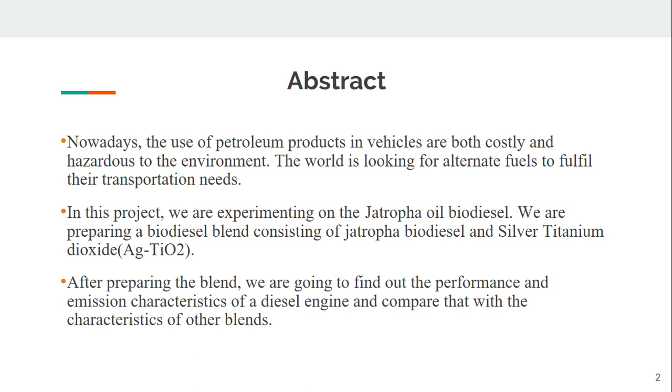Now, after preparing the blend, we are going to find out the emission characteristics of the diesel engine and compare that with the characteristics of the existing diesel. To introduce the thing, the renewable transportation fuels are ethanol and fuels derived from animal fats and vegetable oils. The choice of vegetable oil as engine fuel is to reduce emissions. There are various oils being considered worldwide for use in engines. These include Jatropha, Karanja, rice bran, sunflower oil, and even soybean oil.

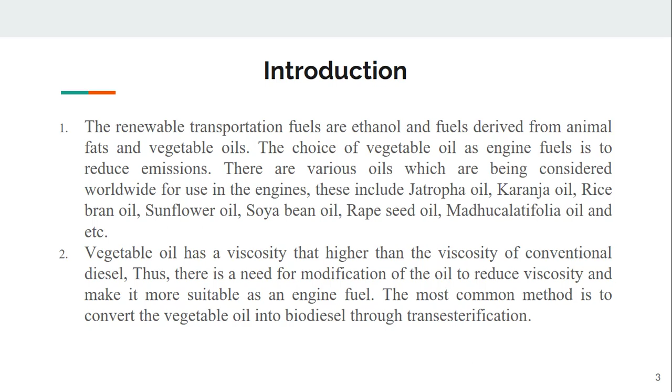Now, vegetable oil has a viscosity that is higher than the viscosity of conventional diesel. Thus there is a need for modification of the oil to reduce viscosity and to make it more suitable and sustainable for the engines. For this, we went through the literature survey, and we found various explanatory methods which can explain problems which we are facing today.

We studied the paper written by PK Sahoo, LM Das, MKG Babu, showing that biodiesel proportion of more than 20% of the blend tends to decrease the BSFC. It is seen that during part throttle test mode, blends with higher percentage of biodiesel in diesel tend to decrease the exhaust smoke. These are the things which we collected.

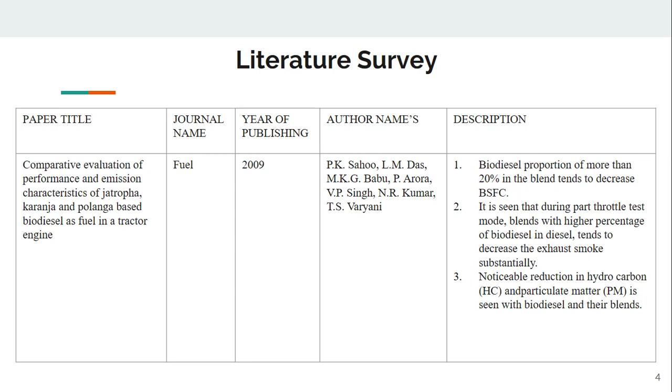Other papers which we have collected show that the oxides are being reduced. Oxides of sulfur, CO2, HC, and all those are being reduced, and the eventual performance quality is being enhanced. This is what we have referred to through 2 or 3 papers, and the list of the papers is given in the PPT.

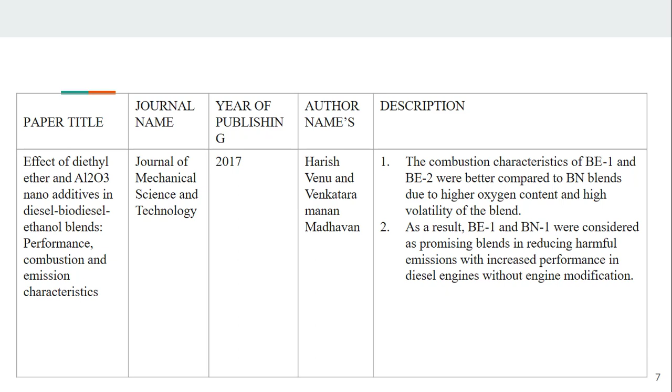Now, to define the problem, we are going to find performance and emission characteristics of Jatropha biodiesel with AgTiO2 as the nanoparticle. There are 2 blends comprising 90% and 70% of diesel, combined with 10% and 30% of Jatropha biodiesel, in which 25 ppm or 25 mg per liter of AgTiO2 is added. Then we are going to compare their characteristics to the biodiesel blends.

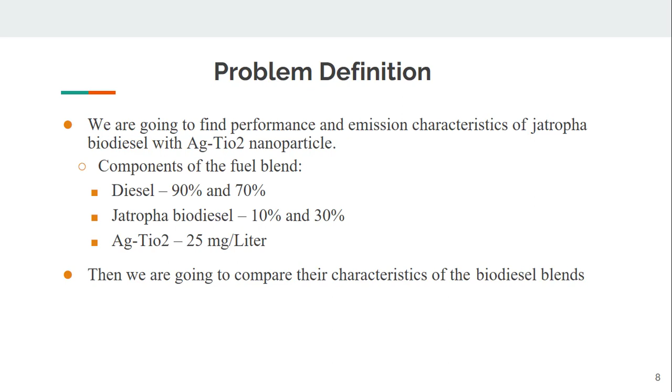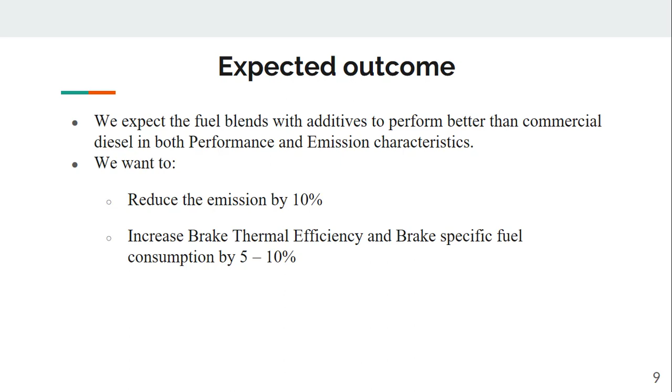Now, we are predicting the outcomes that we expect. We expect the fuel blends with additive to perform better than commercial diesel in both performance and emission characteristics. We want to reduce the emission by 10%, and improve brake thermal efficiency and brake specific fuel consumption by 5 to 10%, which will enhance the engine's performance quality.

After which, the most essential thing was that we had to mix the biodiesel and the nano additive to its particulate level so that the emission results which we get are perfect because of the continuous blending.

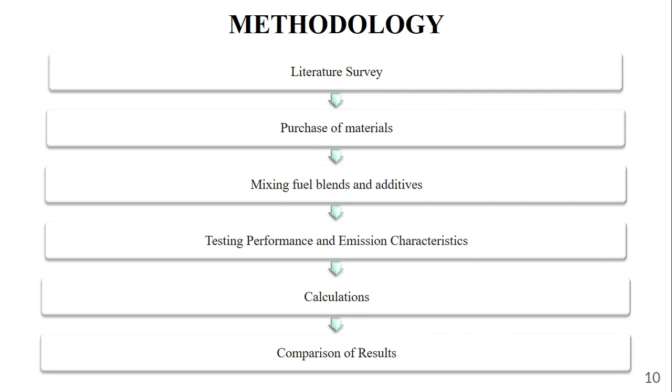Now then we went through the theoretical calculation, and after the theoretical calculation, the comparison of the results was done. Now to go on with the engine specification as it is given in the PPT.

Now we go through the speed - the engine runs on a constant speed. Cooling arrangement is water cooled. The cylinder bore is 87.50 mm, stroke length is 110.00, connecting rod length is 234. Compression ratio is 17.50, swept volume is 661.45 cc.

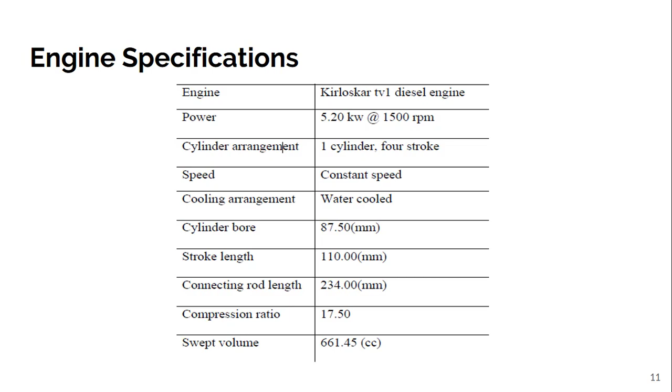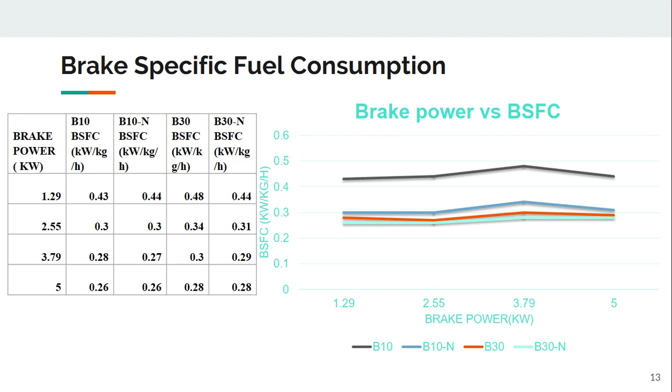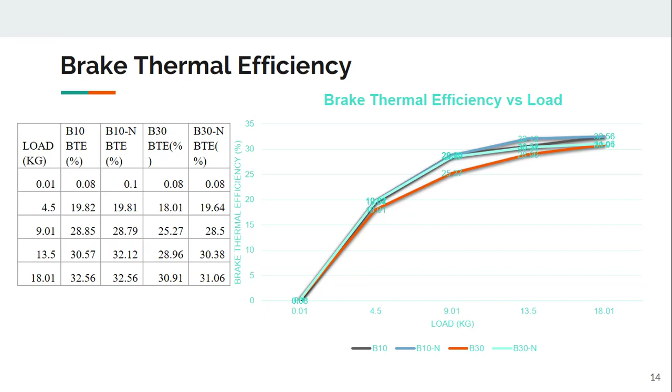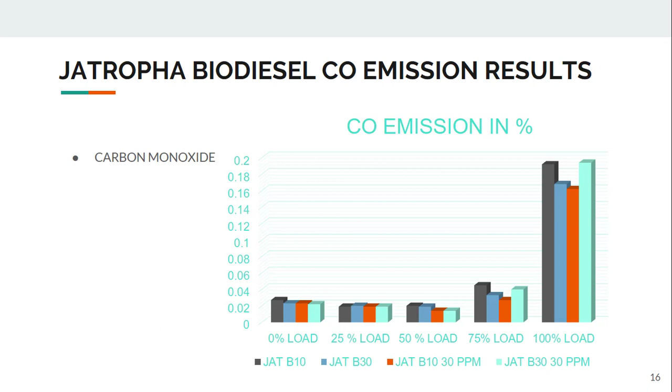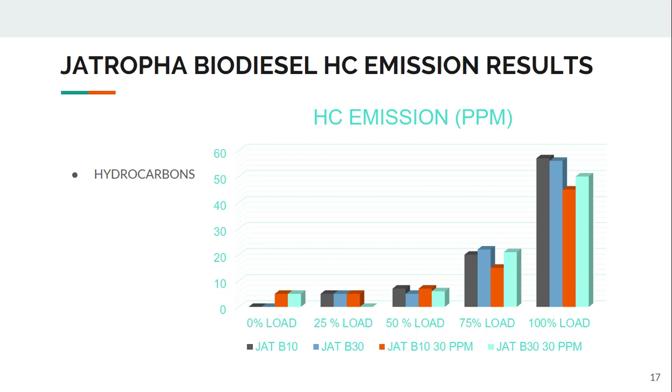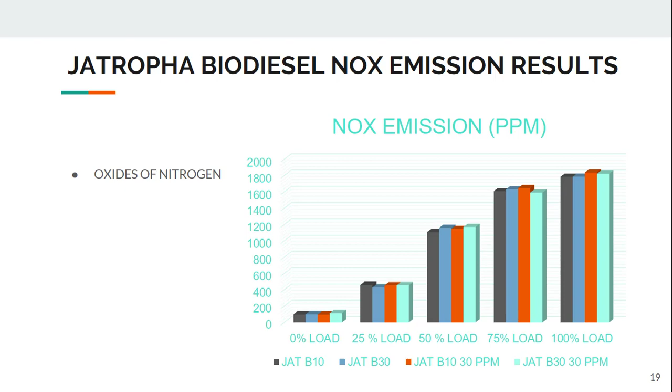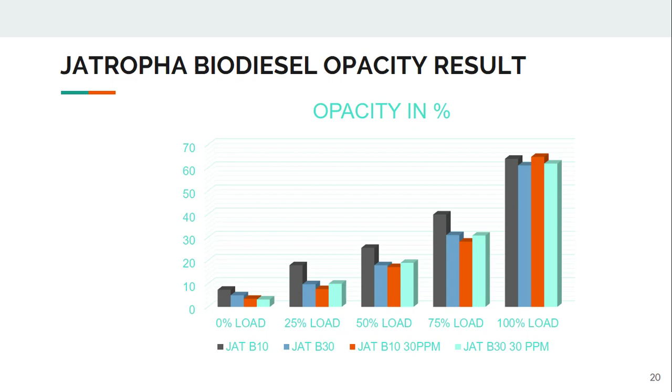Now smoke opacity is lower in the nano additive due to the complete combustion that happens in them compared to the normal blends. The additive acts as a buffer and improves combustion and ignition. This is completely because of the AgTiO2 present in it. The Ti gets separated, O2 gets separated, and they eventually and individually act as a combustion enhancer, so the thing is totally in scrutiny and works very logically.

Now to conclude the project: a stable dispersion of AgTiO2 nanoparticles in biodiesel was obtained using sonication. It is observed that there is a marginal increase of 3.3% at maximum load in BTE when AgTiO2 nanoparticles are used as a fuel additive in diesel fuel. Addition of AgTiO2 nanoparticles also results in an increase in NOx emissions of 5% at maximum load. However, a decrease in the emission of unburnt hydrocarbons by 12% and carbon monoxide by 14% at maximum load is observed with the addition of TiO2 nanoparticles in diesel.

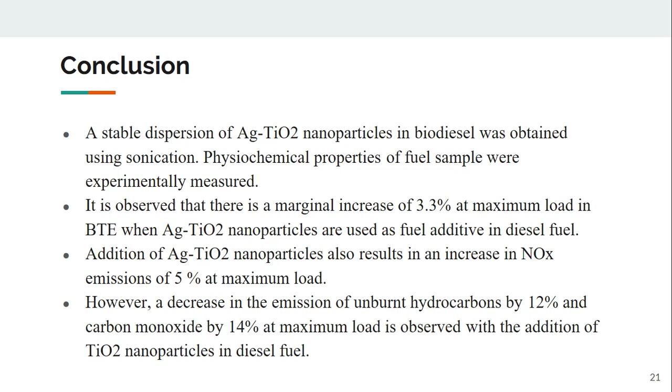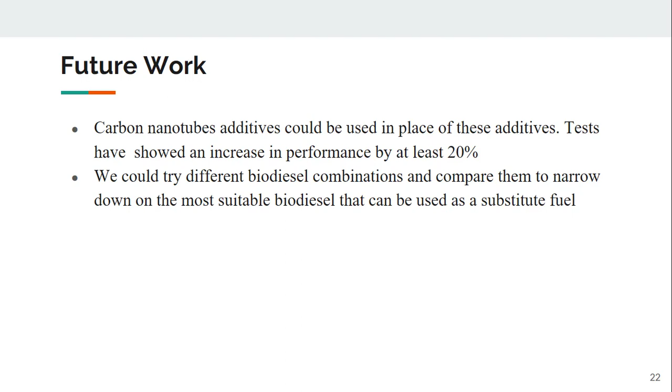So this is how we achieved all this, and this is the chronology that we followed till the end of the project. We feel like this will give us a proper way, a proper thinking, a proper chronology through which we can approach the problem with a better fuel, which is not destroying the environment completely, and is environment friendly.